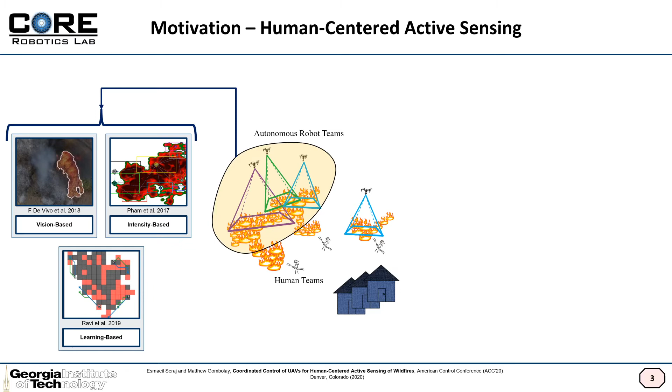Nevertheless, these are not our only motivations here. There is a clear absence of human-centric approaches in the autonomous multi-agent fire monitoring literature. This is mainly because a majority of previous studies are solely focused on fire detection or surveilling a large burning area rather than focusing on local human-defined areas of priority. Firefighters may easily lose their lives as a consequence of inaccurately anticipating information due to low-quality information provided regarding their time-varying proximity to a fire.

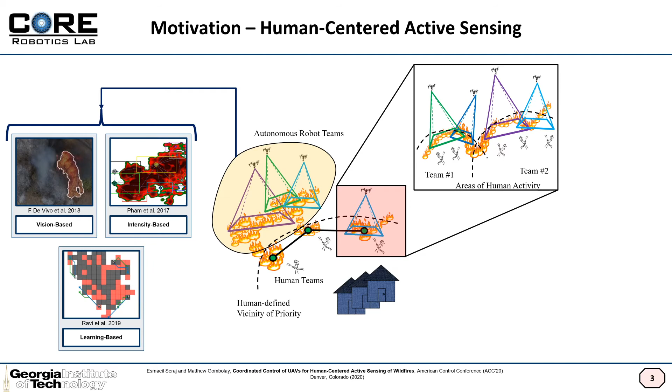Here, to give the information quality a better sense, by high-quality information, we mean local, high-resolution images or other sensory information that are captured from a close-by distance with respect to the areas prioritized by humans. Here, we propose our distributed control framework for human-centered active wildfire monitoring.

In our approach, we propose a dual-criterion objective function based on Kalman uncertainty residual propagation and multi-agent consensus protocol, which enables the UAVs to cooperatively track and monitor the fire transition and provide safety information for firefighters on the ground using the acquired information. Here, Q and P are discretized fire and UAV positions, U is a measurement uncertainty map, and E is the total displacement energy among all networked UAVs.

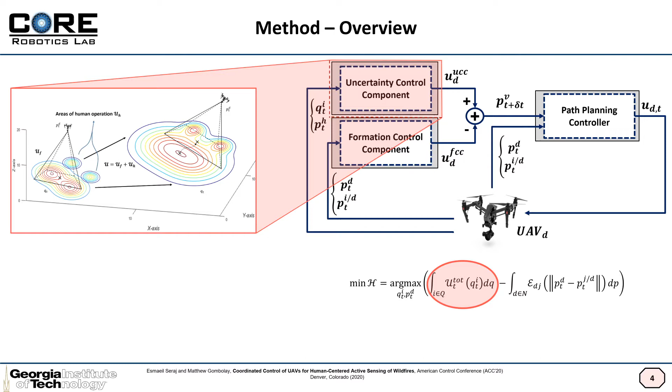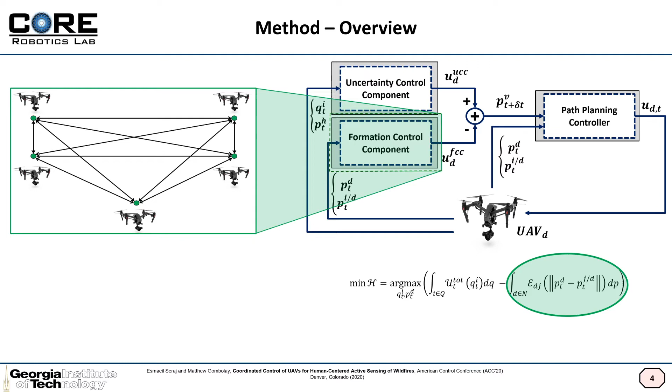Specifically, in the first component of our objective function, UAVs try to minimize the measurement uncertainty by flying around a combined uncertainty map made up of both wildfire propagation areas as well as areas of human operation. We also incorporate a formation controller in the second term of our objective function to encourage the UAV team to maintain a formation consensus for maximizing the coverage. Maximizing this dual criterion objective function generates the virtual next position PV for each UAV at node level, which is then fed into a path planning controller to generate the driving forces.

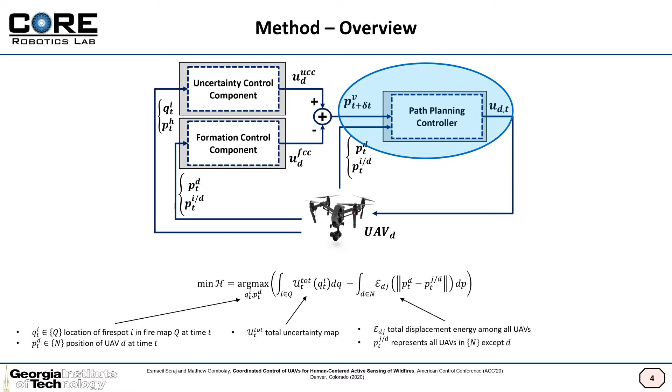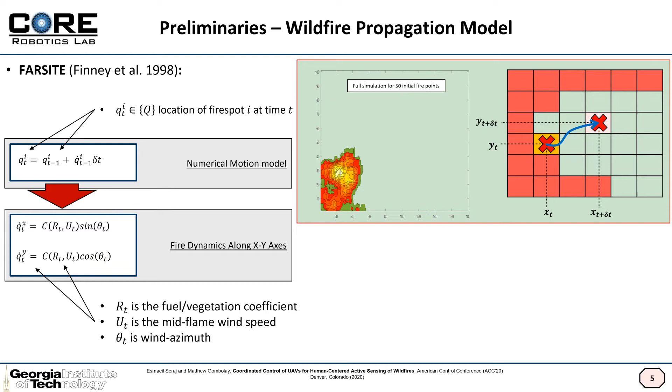But before diving into the details of our controller, let me introduce the FARSITE fire propagation model. The Fire Area Simulator, or FARSITE Wildfire Propagation Model, was first introduced in 1998 and is now widely used by the USDA National Park Services, USDA Forest Services, and other land management agencies at the federal and state levels in the United States. It uses a numerical motion model for fire spot Q at time t, in which Q dot is the fire growth rate, which is a function of three essential environmental parameters, R, U and theta, that represent fuel or vegetation coefficient, mid-flame wind speed, and wind direction, respectively.

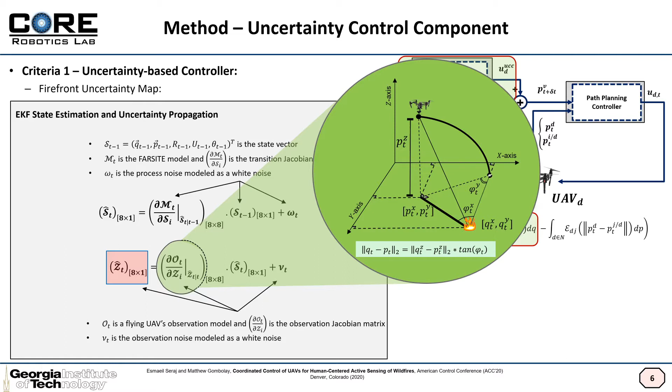which is then fed into EKF's observation equation in order to map the state space to observation space and obtain the state estimates as observed by a flying UAV sensor. While I do mention that here OT represents a flying UAV's observation model of a dynamic fire spot on the ground as shown in this figure, please refer to our paper for more details on these derivations. Now, we can use EKF's measurement error residual to propagate the uncertainty about the estimated state variables and accordingly generate a fire uncertainty map.

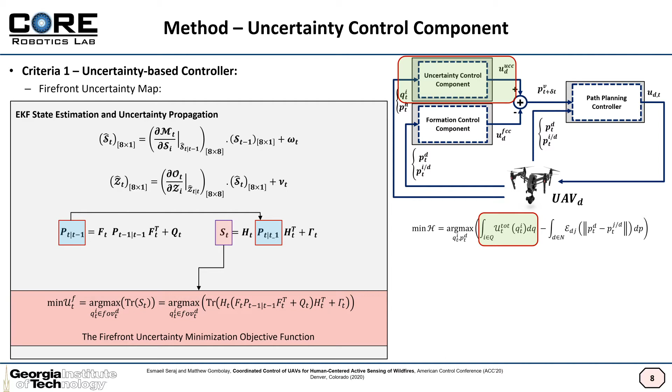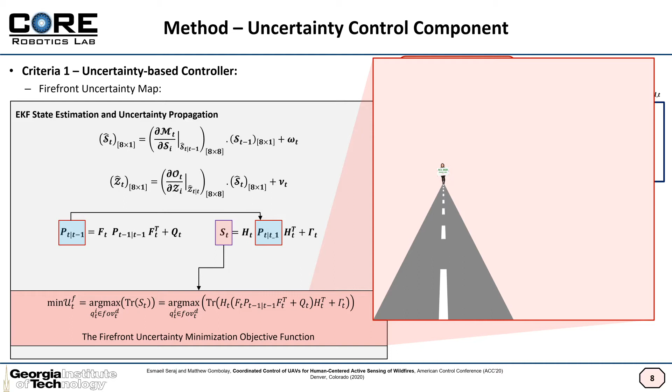But what does it even mean to maximize the prediction variance? For intuition, let's look at it this way. If you are uncertain about an information, say the notes on a sign you're trying to read in a distant location, you get close to have more accurate and higher quality information. This is exactly the idea behind our uncertainty-based controller, which means a maximally informative position for a drone is the one that minimizes the HH transpose multiplication in the prediction variance equation, or in other words, the closest possible position where dynamic observations change rapidly.

Technically, assuming two fire spots that one is closer to our UAV sensor than the other, with the exact same observation angle error, the estimation error associated with the farther point is much greater than the estimation error of the closer point. Therefore, we try to minimize our estimation error or uncertainty by trying to get as close as possible to the target points. As such, our objective function enforces the UAVs to fly to locations with higher uncertainty, which then leads to lowering their uncertainty as UAVs get closer.

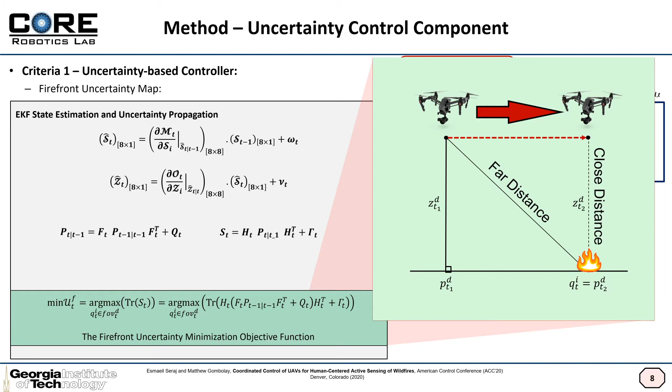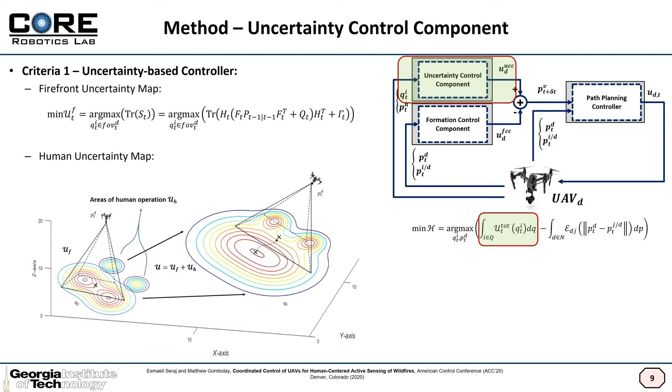Now, let's hold on to this fire uncertainty map. As I mentioned earlier, we also create a human uncertainty map to be combined with the fire uncertainty map. As shown in this slide, while hovering around the highly uncertain areas, UAVs are required to focus on their human collaborators on the ground as well and take their safety into account by putting additional concentration on the areas of human operation. So UAVs receive human positions, for instance, through GPS devices, and generate a bivariate Gaussian distribution to account for both GPS error as well as mobility of the humans.

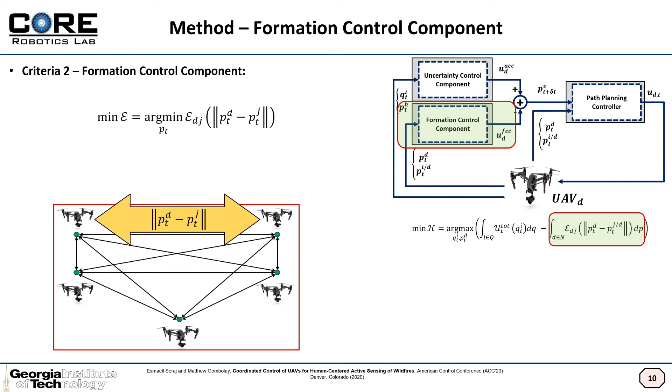The second component of our controller is the formation control component, to ensure that the combination of our uncertainty objective functions results in local actions leading up to appropriate global performance. We enforce this extra control module in such a way that the UAVs also act on other easily measurable information, such as the relative distance to neighboring drones. This is specifically important to disperse UAVs from converging to an extreme minima, like a highly uncertain point, while preserving the connectedness of the network.

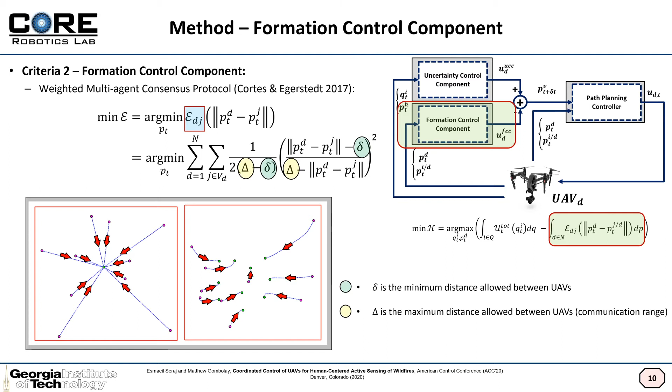To this end, we leverage the weighted multi-agent consensus protocol with an energy function as presented with the objective of minimizing the total displacement error E, while preserving a distance of at least a small delta between all UAVs with maximum communication ranges of capital delta. In this way, a negative force will be generated to move UAVs apart from or close to each other if they are getting closer than a small delta or farther than capital delta.

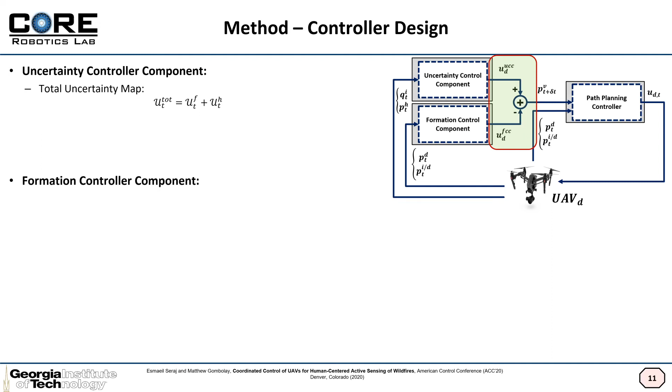Next, to calculate the driving forces generated by the uncertainty and formation control components, after combining the two fire and human uncertainty maps, we calculate the negative gradient of the total uncertainty energy with respect to the drone's position PD along X, Y, and Z directions. Same is repeated for the formation control component that generates the second driving force. Here, the kappa 1 and 2 are the respective gain coefficients for uncertainty and formation controllers.

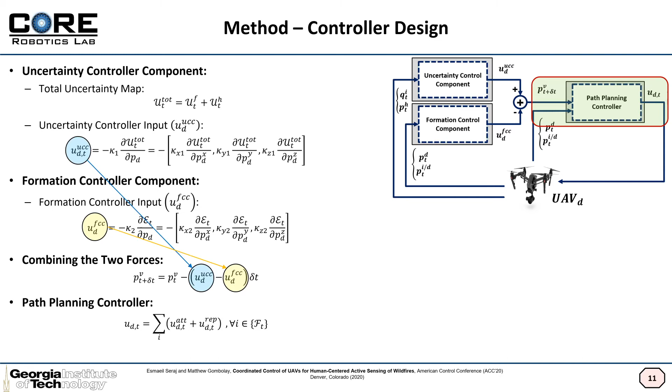Next, we combine the two forces to generate the next virtual position, or a potential goal, for each drone D, which is then fed into an artificial potential field-based path planning controller to generate the final control input UD for each drone. The path planning controller can generate a set of attractive and repulsive forces to move the robot towards its next virtual position, or to avoid undesirable poses, such as altitudes too high or too low. And eventually, the final control input results in a position update for each drone D, as shown here.

This figure shows the simulation results of 8 sample time steps between time 20 and 300 seconds, where squares are drones' respective fields of view projected on the ground. The simulation parameters in our empirical evaluations are shown in the table.

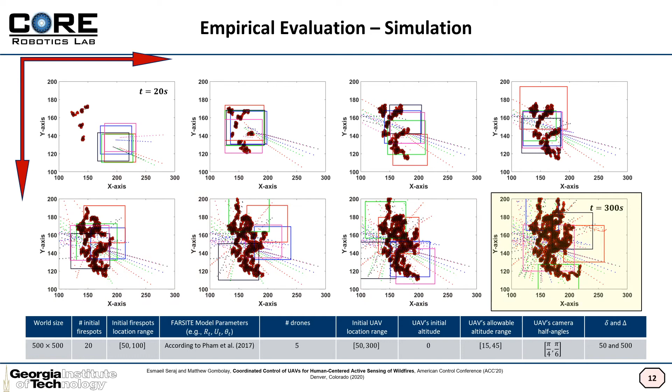As shown in our simulation results, UAVs start from a distant location and move towards the locations where there's uncertainty about their estimation in order to have better estimation and therefore lower their uncertainties. Eventually, as shown, after 5 minutes of running the simulation, we can see that the UAV team can distribute effectively and cover the wildfire area to reduce their measurement uncertainties.

We also evaluated the efficiency of our controller for distributed coverage tasks against 2 benchmarks: a state-of-the-art model-based distributed control algorithm and a deep reinforcement learning baseline. The first benchmark is a fire heat intensity-based distributed control framework for wildfire coverage, which incorporates an artificial potential field-based controller. For the RL baseline, we trained a policy network to control UAVs.

We ran the simulations for 100 time steps for all 3 methods for a total of 10 trials, where for each trial a cumulative uncertainty was calculated by the EKF for fire points not covered by any drones at each time step. While the RL baseline failed to learn a useful policy during 1,000 episodes of training, our approach shows significant improvements by reducing the cumulative uncertainty residual by more than 10 to the power of 2 and 10 to the power of 5 times the other 2 benchmarks.

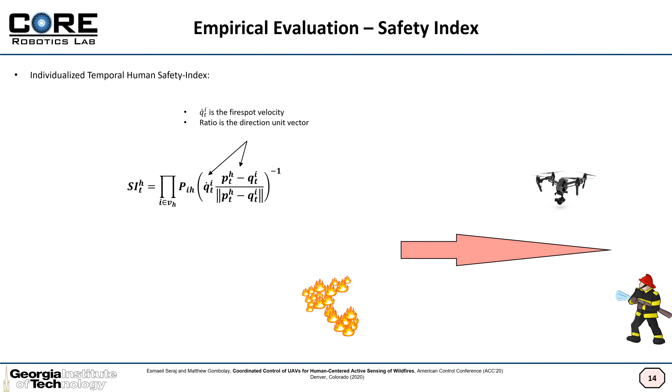As a corollary of our algorithm, we leverage the estimated fire model parameters R, U and theta and calculate an individualized safety index SI as a temporal quantity by taking into account the velocity and direction of the approaching firefront, and report this quantity to firefighters for situational awareness. Here, PIH is a cumulative distribution that predicts the probability of fire spots moving inside a circular vicinity with radius RS of the human firefighters.

Therefore, we note that this safety index is basically a time index that shows a probabilistic measure of how long it is left before fire gets too close to firefighters. An important note about this individualized safety index is that it can be used as a weighting coefficient when scaling and combining the human and fire uncertainty maps to prioritize among firefighters.

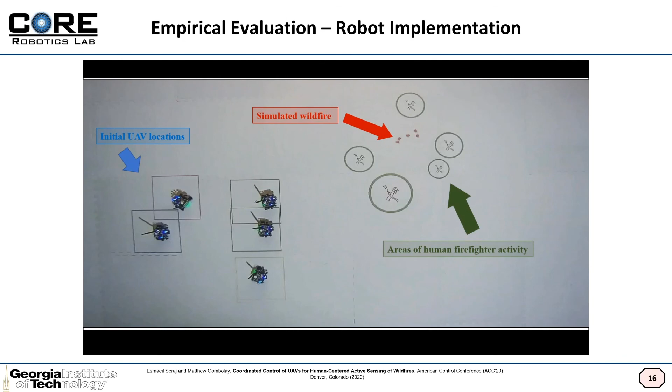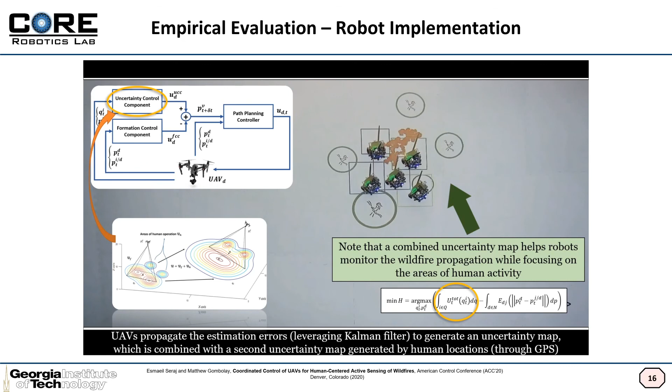We also evaluated the feasibility of our method on physical robots. We implemented a distributed controller on 5 robots in a multi-robot testbed. Robots were tasked to cover a simulated wildfire while focusing on the activity areas of 5 simulated moving firefighters. Note the swarm-like behavior of the robot team as a result of our combined formation controller and uncertainty controller, which through a combined uncertainty map enables robots to monitor the wildfire propagation while also effectively focusing on the areas of human activity.